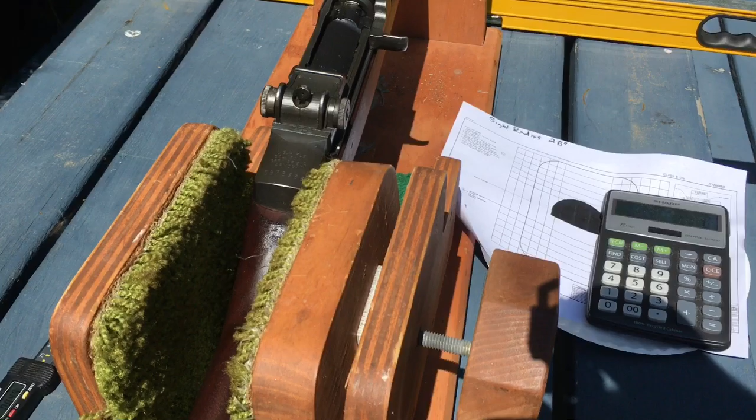Okay, so you're not happy with needing a lot of adjustment on your rear sight to get your shots where you want them to hit. You don't know how to really adjust your front sight to compensate for that. Well, the first thing you have to do is center your rear sight windage on the zero, the line on the receiver, center it up.

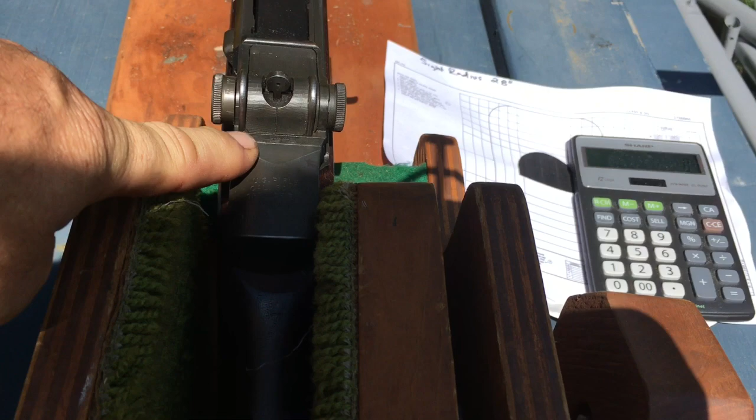This particular rifle, I don't know if you can see it or not, but I'm pretty far over. I'm almost all the way to the left, but I don't mind that so much. I'd rather have my rear sight moved than looking at my front sight that has to be moved more left or right from center. I'd rather be looking at a centered sight. I just feel better that way. I like looking down the rifle, seeing my front sight assembly closer to the center. So I don't mind adjusting a lot on this side. That's why they give you so much windage adjustment down here.

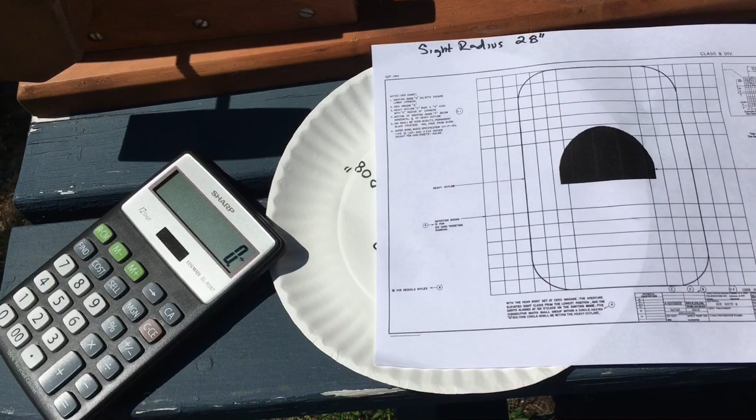Anyway, the easiest way to do it is 25 yards. This is a Garand sight-in target. You can use this particular one from 1,000 inches or 27 yards out to 100 yards. They give you all the different specs for the size of the aiming black and the outline and everything in this block here. To keep things simple, 25 yards, 1/4 inch. It makes things really simple.

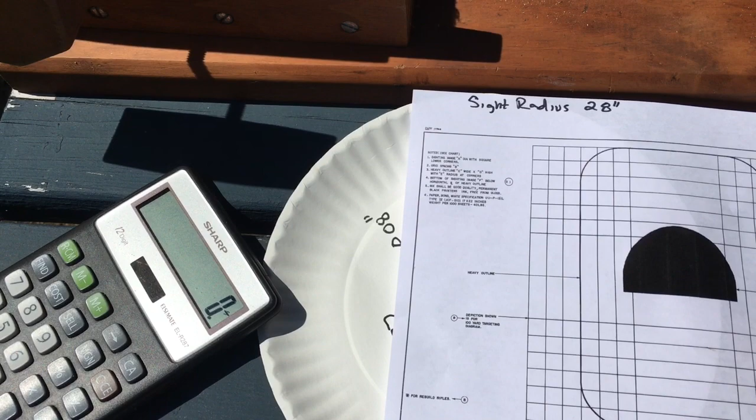The sight radius on an M1 Garand is 28 inches. That's how you're going to figure out your correction. You need to know your sight radius, how much correction you need, and at what distance you're shooting. 25 yards. 25 yards is 900 inches. Now your correction calculations are always going to be in inches.

Now the next thing you need to do is to loosen the Allen key, I believe it's 3/16, and center this sight the best you can. So now your front sight, just do it by eye. It doesn't have to be perfect. Do it by eye, center it up the best you can, retighten it. Make sure you tighten it. Center your rear windage. Then come up 8 clicks from the bottom. So you want to bottom it out, then come up 8 clicks. That's where you want to start. We're doing windage, not elevation.

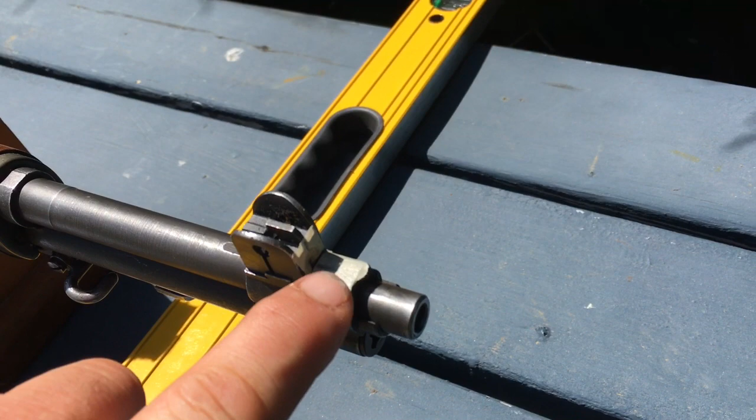And then I will always tell you to make some sort of easy reference mark so you can see your movements. You can use a dial caliper and measure it. It's all fine and dandy. I make a few marks. You're making small movements, so the finer marks you can make, the better. I don't go too crazy. I just make a reference mark so I can see movement. You can't really see the pencil mark here.

And another thing to do is make sure you clean the metal really good before you try sticking anything on there, because if you don't, it's not going to stick, and after 2 or 3 shots it'll fall off. Sometimes I'll just mark the metal itself with a pencil. I can't see as well as I used to, so now I use tape. And I still do that even though I'll use the cheap calipers to measure my movement.

So let's start right from the beginning. You zero or center your front sight the best you can. Just look at it. That one's pretty close. You can see the little ledge on this side, a little ledge on that side. Okay. And then center your rear sight. Make sure your front sight is tight. Now place a target at 25 yards.

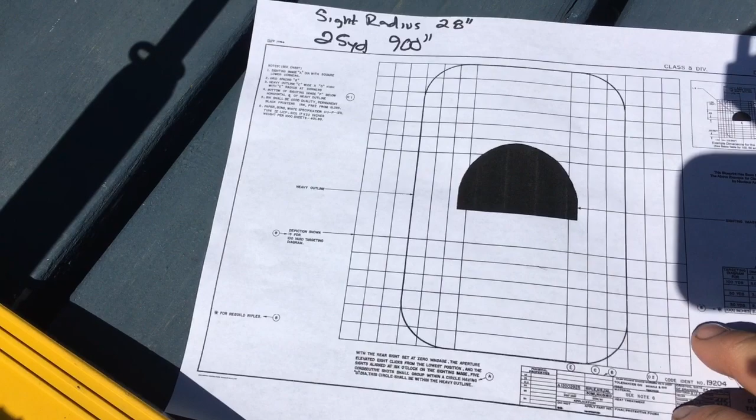I personally draw a 2-inch dot on a piece of paper. I'm only using this because this is what I have. You can use 1/4-inch graph paper, draw a 2-inch dot. This makes it real easy. You just put your front sight right up on that flat line. So it just makes it really easy to aim.

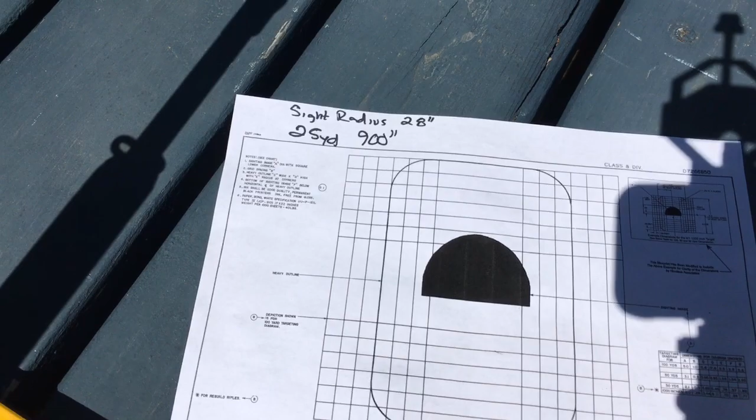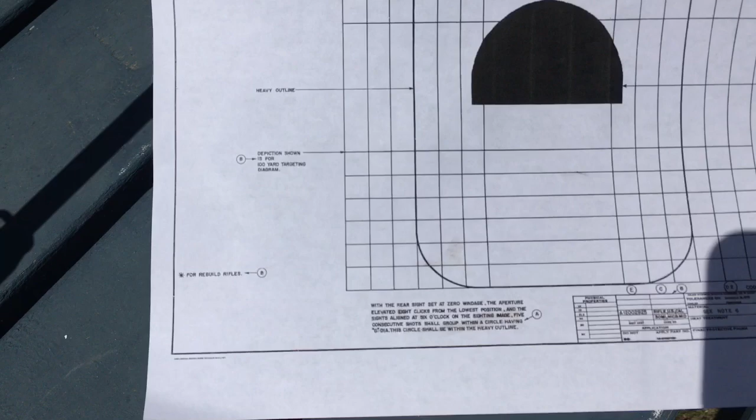Remember, we're not trying to get elevation or zero your ammo for the conditions. We're trying to get a baseline zero, a no-wind zero, mechanical zero, within close enough specs where you can now zero your windage and elevation to you, for you and your ammo, on the rear sight. So what you're going to do, put this at 25 yards. Then take 5 shots.

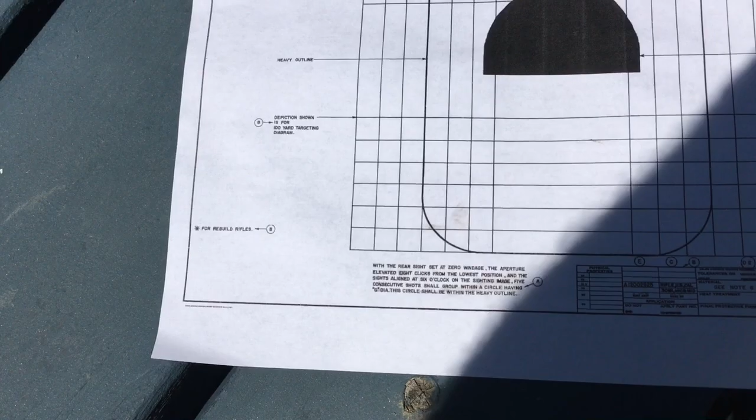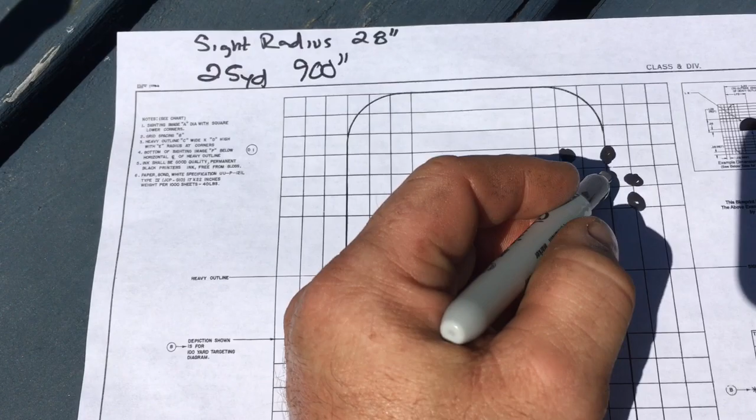Now specs say an M1 Garand is worthy to leave the factory if you could put 5 consecutive shots within a 1.7 inch group at 1,000 inches or 27 yards. So just say you take your shots and you're hitting 1, 2, 3, 4, 5. Just say your shots look something like that. What you want to do is find the rough center of that group. We're just going to call that right here. That's your center of that group. You want to move it to the center line here.

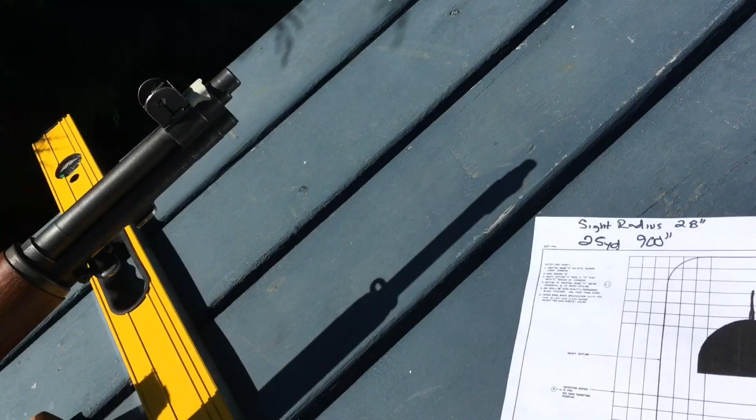Okay? Now, if you're at 25 yards using 1/4 inch graph paper, each one of these squares is roughly a 1/4 inch. This is a 1,000-inch target. 30-yard target on here, you can see down. It's hard to see, plus the sun's to my back, I can't see my screen. But 30-yard target: the aiming black is a little over 2 inches, and each square is 0.3 inches.

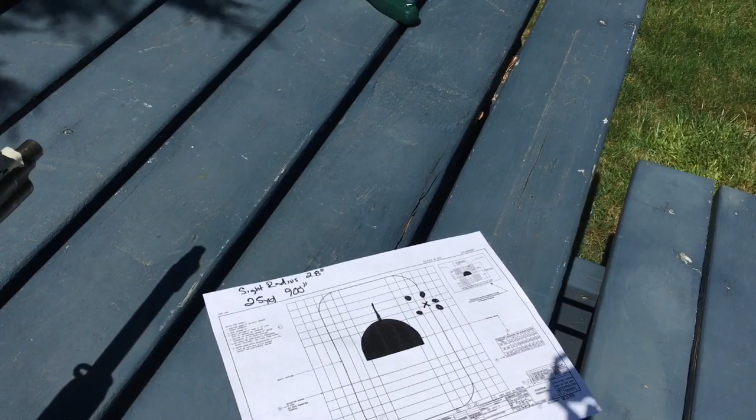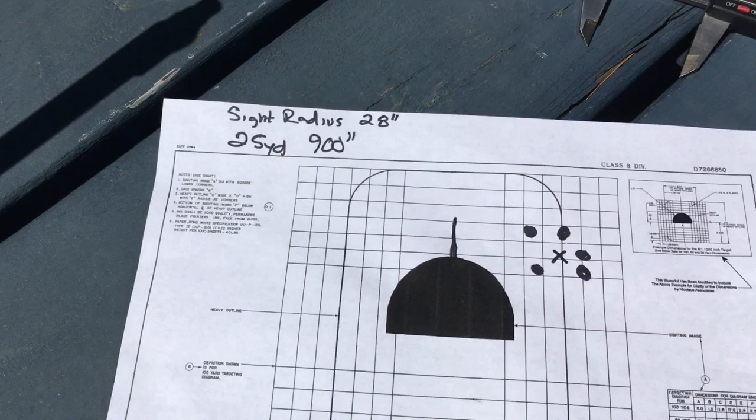But you can always pick up an inexpensive set of calipers. 15 to 30 bucks is all you really need for this kind of stuff. It's just close enough, good enough. So we need 1.775 inches of correction. All right. So 1.775 inches. So how that works out,

Change the camera angle a little bit here. I've been working around the yard, so I got all kinds of other tools kicking around. All right. Sorry, I gotta move again.

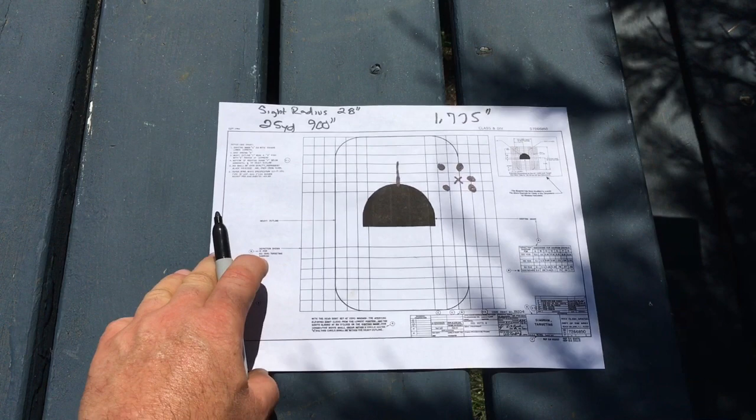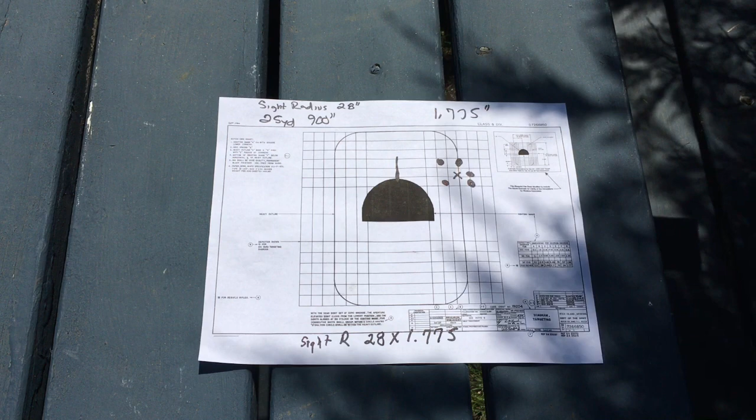Alright, so this is where your sight radius and your distance to your target in inches come into play. Your sight radius is 28 inches times your correction, 1.775. Which is 49.7.

Now you need to divide the 49.7 by your 25 yards or 900 inches. Which means your correction is going to be 0.0552 inches. So you have to move your front sight.

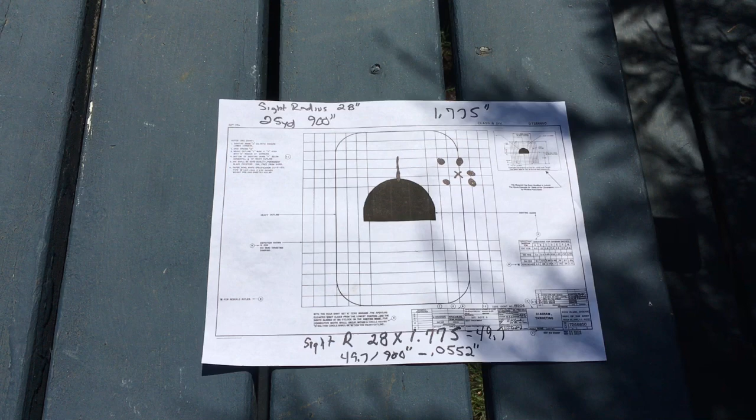Here's your rear sight. I don't know if this is going to show up well. I can't see the screen. Here's your rear sight. Here's your front sight. Here's your center line. You're off to the right. You need to drift your front sight to the impacts.

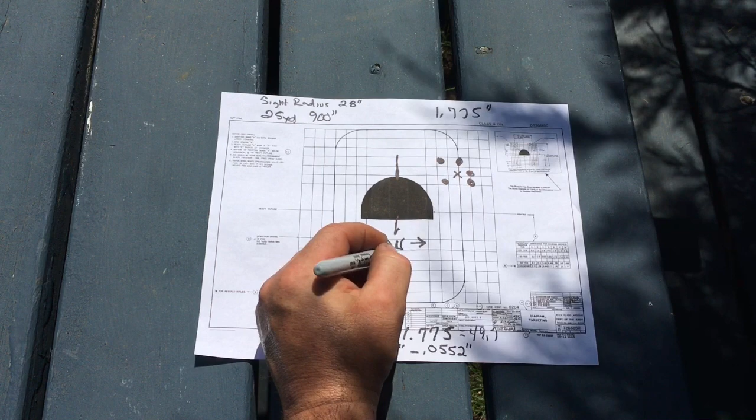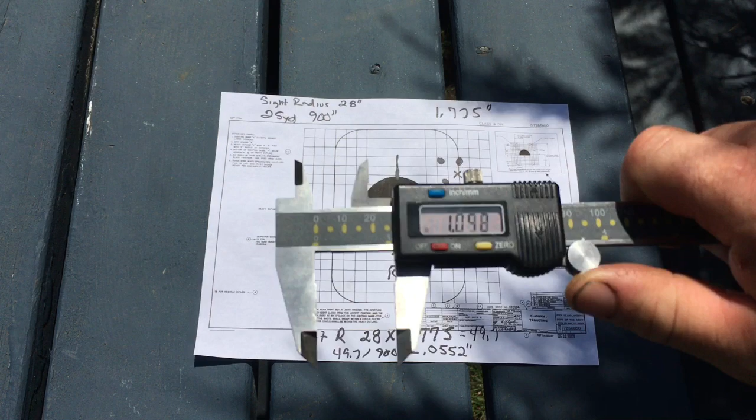And so now what you're doing, here's your sights lined up as it is. When you move that sight, now you have to pull that sight back into alignment. So you're moving the shot group over. So you move your sight over 0.0552 inches. Again, get your calipers out. .055.

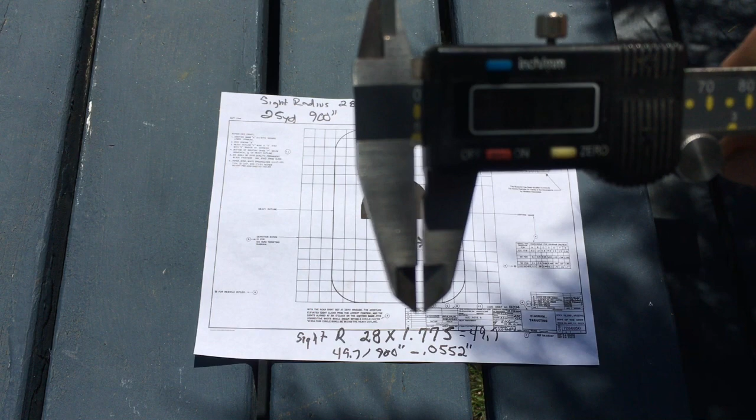I don't know if you can see that good enough, but that's how far you need to move your front sight. And the front sight is opposite. If you need to move your impacts to the left, you need to move your front sight to the right. If you want to move your impacts up, your front sight has to come down. If you want to raise your impact,

Sorry, I just got distracted by a bee.

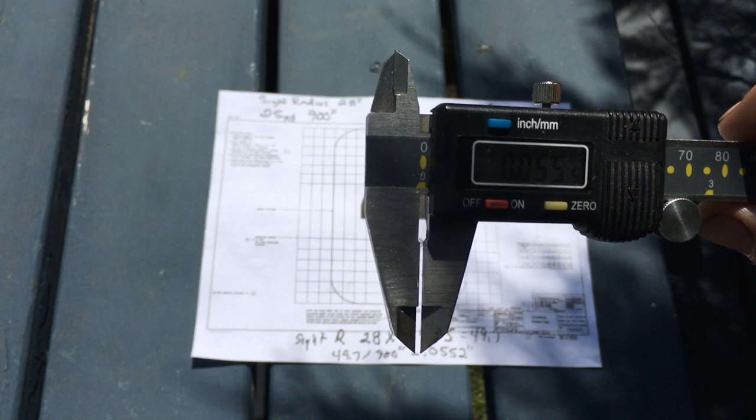Anyway, your front sight's opposite. If you move it left, your impacts will move right. If you move it right, your impacts will move left. So front is opposite, rear is the same. So if I had to move my front sight to get this shot group on, it'd be 0.0552, which would be, I don't know if I can get this in there, good enough, pretty close to the edge. So that sight would be sitting flush with the edge.

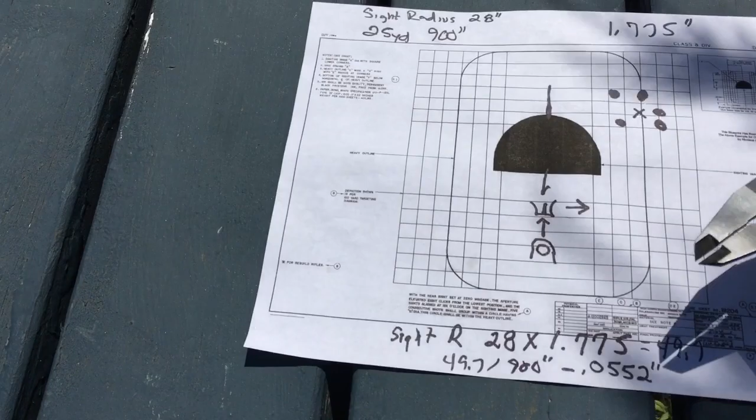Now, when they were making the M1 Garands, they allowed for a little bit of overhang on the front sight, because they would do this at the factory. They would shoot the gun and they would get it so it impacts somewhere in this heavy outlined area. As long as your 5-shot group was in that thick outlined area there,

this section here, it was good to ship from the factory, because now with the rear sight you have plenty of adjustment to get a personal zero, or the zero for the soldier it was issued to, and anybody else who picks up the rifle. But it's good to have a solid mechanical zero where you can get a good baseline from.

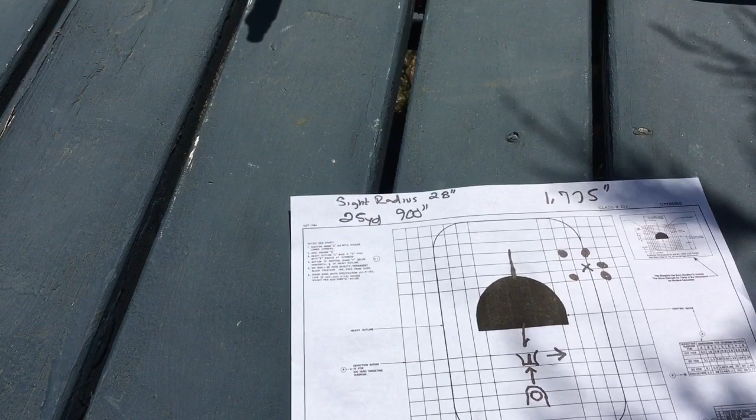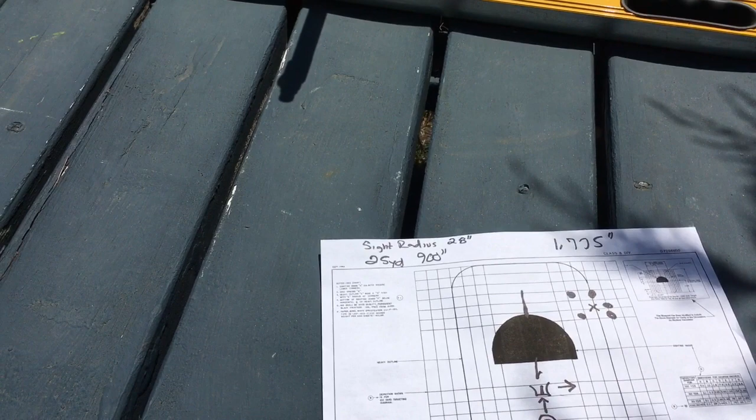Now, anytime you change ammo, lighting conditions, the way you hold the gun, clothes you wear, it'll change your point of impact a little bit, some more than other. Really bright days, a lot of bright light and glare, I'm talking several minutes for me. Different positions. For me, with the M1, going from prone to sitting is an easy 3 minutes of angle change. It's just because of the way I sit behind the rifle.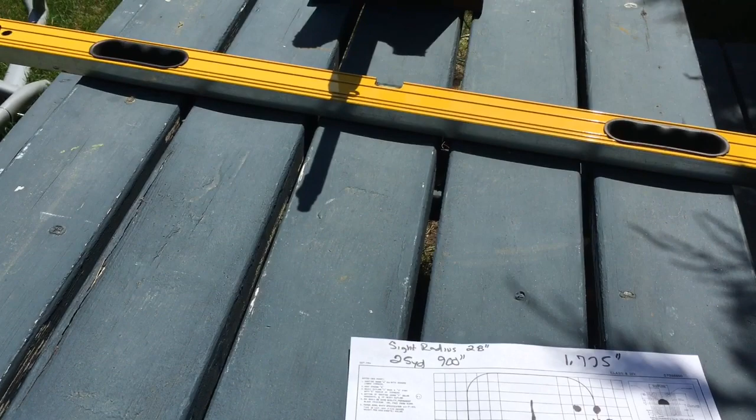I can't get a good snug tight position sitting with the Garand. So my position changes, my eye position changes, how much I'm looking through the peep changes. I'm not as close to the peep as I am when I'm shooting prone. It all plays into it, but this will all get you close enough.

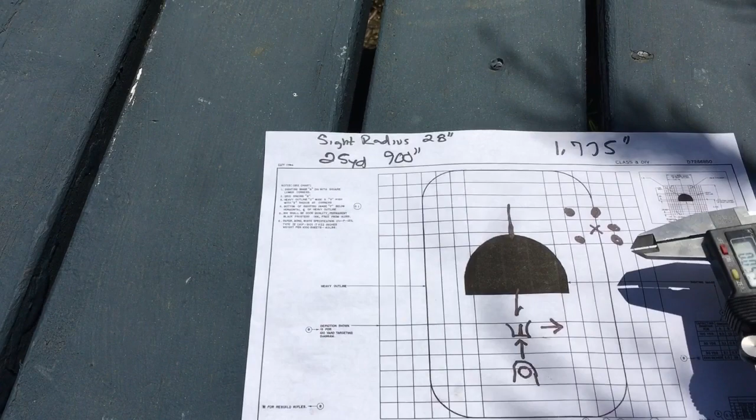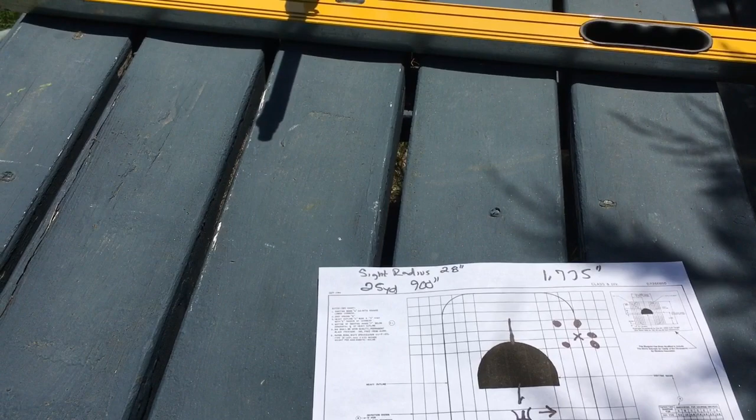Your whole point of zeroing with the front sight is to get your group as close to center as possible. And then just leave it alone. Use your rear sight to zero. Now, if you find yourself still way over in one direction with the front sight and still extreme on your rear windage, you got other problems. My advice, if you can get it to zero and shoot well, leave it alone. If it's still way off center and you cannot get it anywhere near the X-ring, then it's time to look into why.